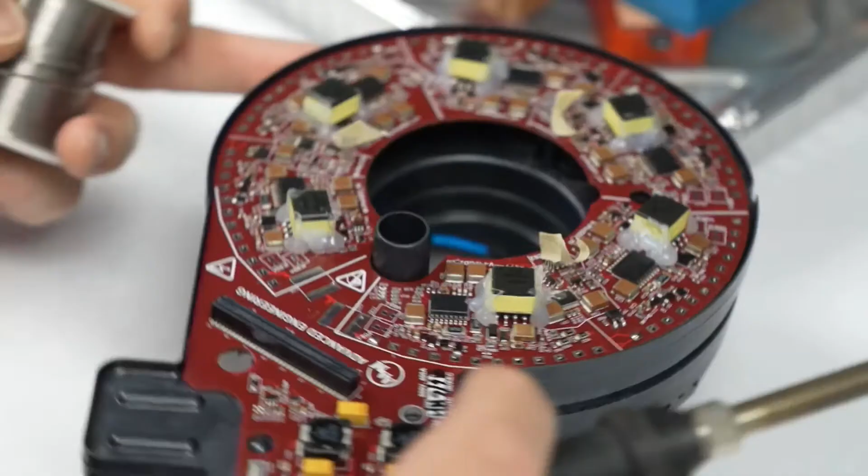Move over internal combustion. Electrification is here, and AAM is ready. We're highly prepared for multiple vehicle segments, scalable volumes, and an infinite number of challenges and goals. Breakthrough products ready now. A pipeline of innovations on the way. We're ready to go and ready to grow.

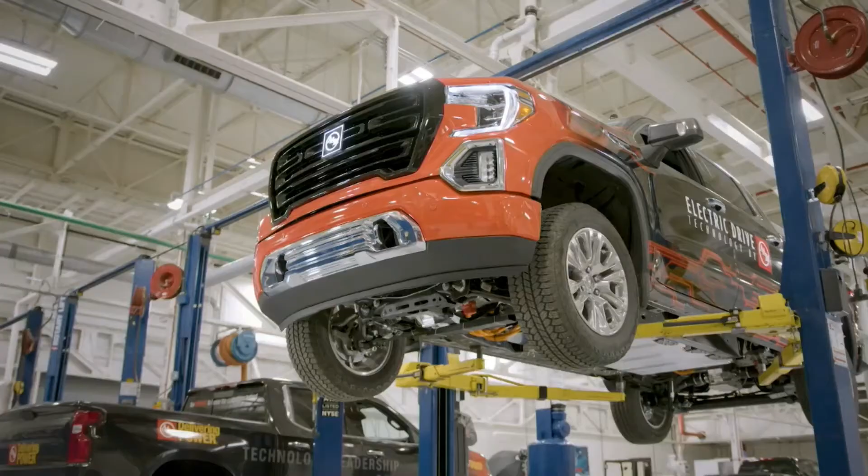What makes us unique at American Axle in terms of innovation? I really believe that our teams are limited only by Isaac Newton. Our 3 primary pillars of the company are operational excellence, quality, and technology leadership. You can't have technology leadership without innovation, so it's absolutely core to our survival.

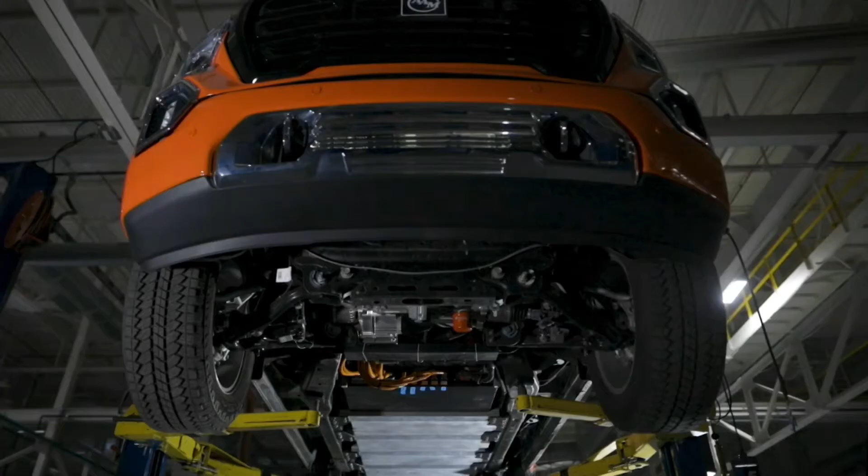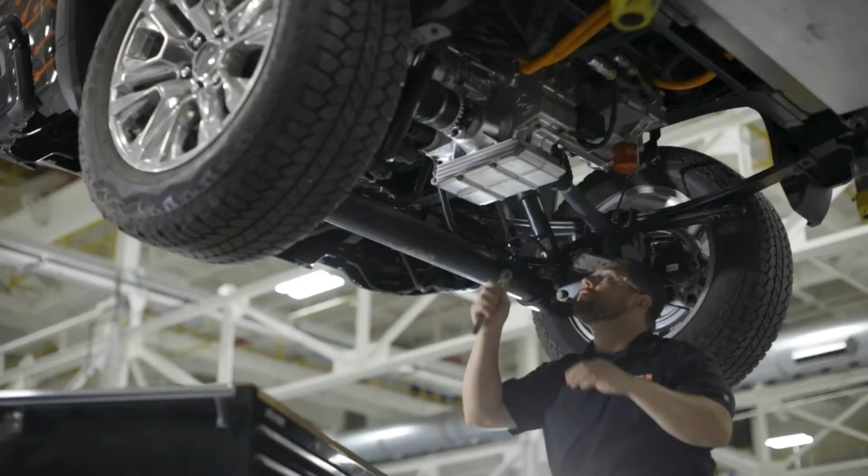We see enormous opportunity by engineering the gearbox, the motor, and the inverter all together. There's huge synergy opportunities for those all to be together. Our partnership with Inovance is very important to us, and we're very excited about it. They know all the car companies in China, they've got connections with them, so that helps us gain access to that market. They also have access to all of the raw materials and components that we're going to need to build inverters.

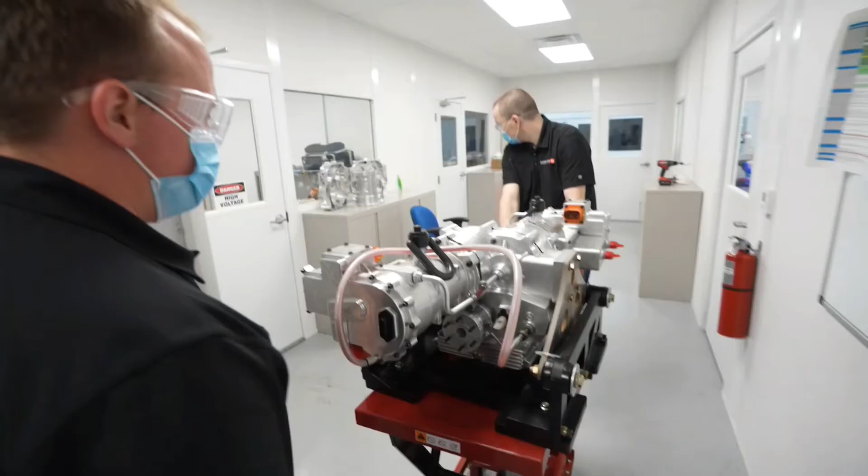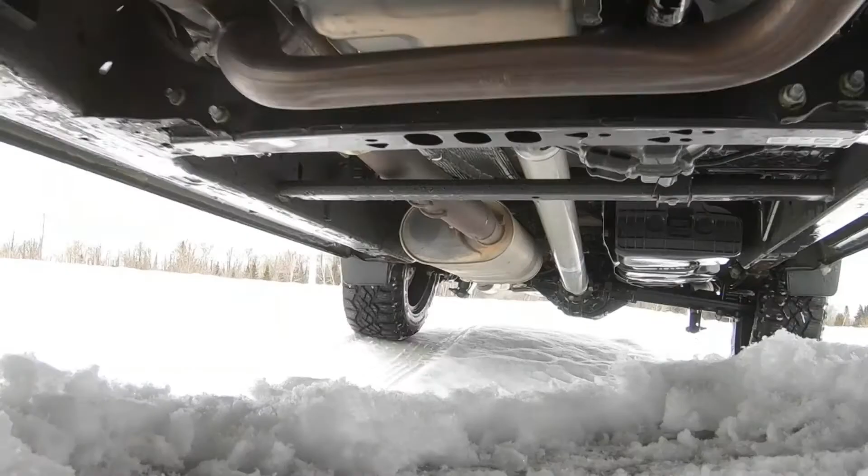What makes AAM uniquely positioned to bring the future faster is this combination of our innovative environments. We produce where our customers need us to produce. We engineer where our customers need us to engineer. Whether that's a vibration control system, a traditional axle, or an electric drive, that advantage is the same. We are where our customers need us to be.

Our vision for electrification at AAM started back in 2010. We've been involved in this space for a number of years. As many people know, we brought the Jaguar I-Pace drive unit to the market. A lot has changed in the market, but what hasn't changed is quality matters. Delivering on time, every time matters. The trust that our OEM customers have in us is very important.

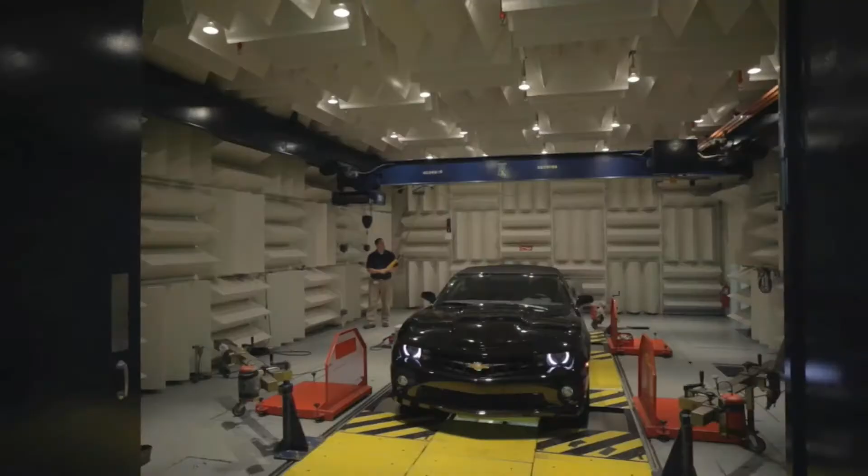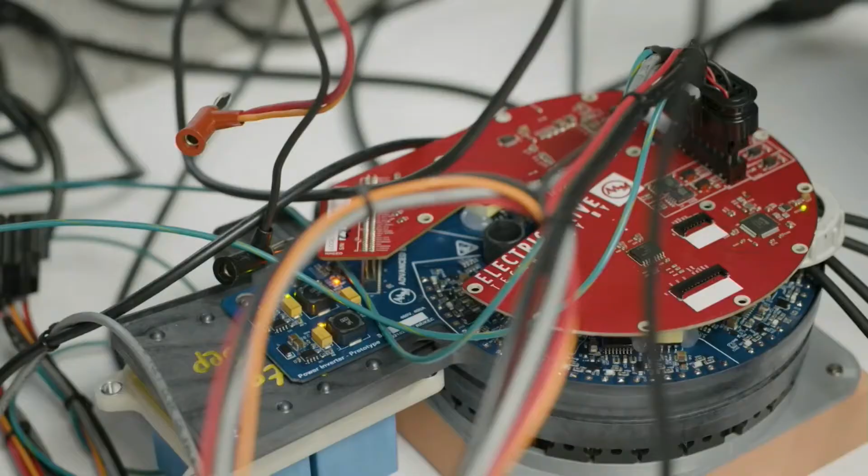It matters in the conventional space, but it matters in electrification. We take a first principles approach to how we engineer product, and we look at what is the absolute limit of what we can achieve. By pushing those RPMs higher, we're able to get the same amount of power with much less active material. By deeply integrating the inverter, we're able to find cost synergies, design synergies that overall reduce the cost of the product.

Craig and his engineering team have pushed the boundaries of what can be done in the eDrive space. They've not accepted the answers that are in the market today. Benchmarking, from our standpoint, is looking at the rearview mirror. What we're trying to do is break barriers and produce products that aren't in the market with attributes nobody's seen today.

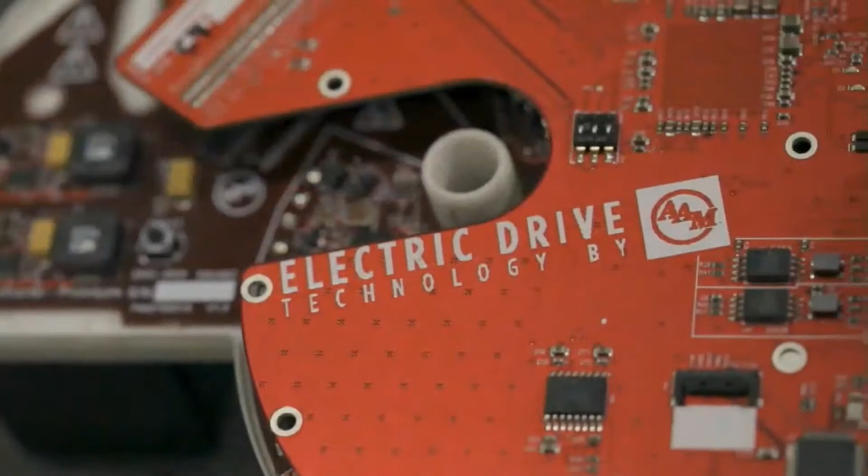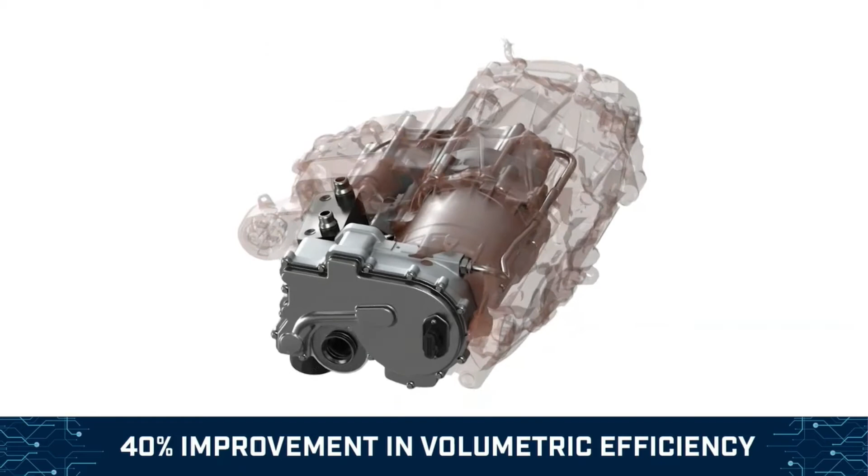At AAM, our next generation 3-in-1 electric drive systems package best-in-class power density with leading efficiency. With a 10% improvement in mass efficiency, 40% improvement in volumetric efficiency, and a 40% improvement in power density, it instantly becomes the new benchmark.

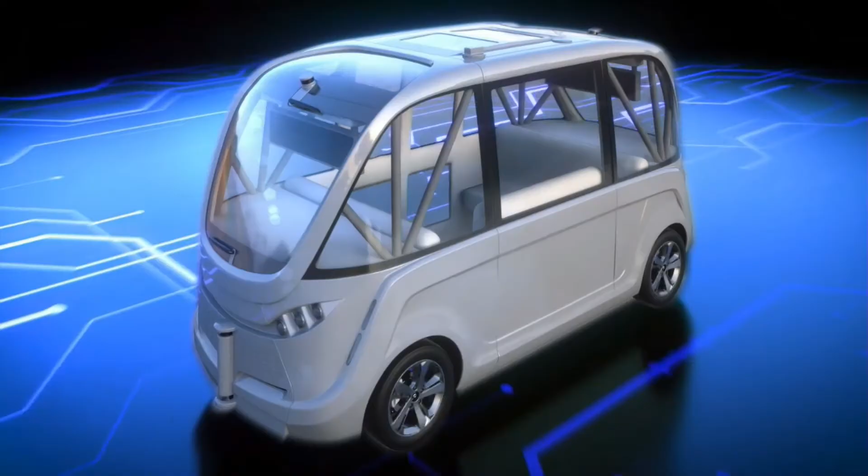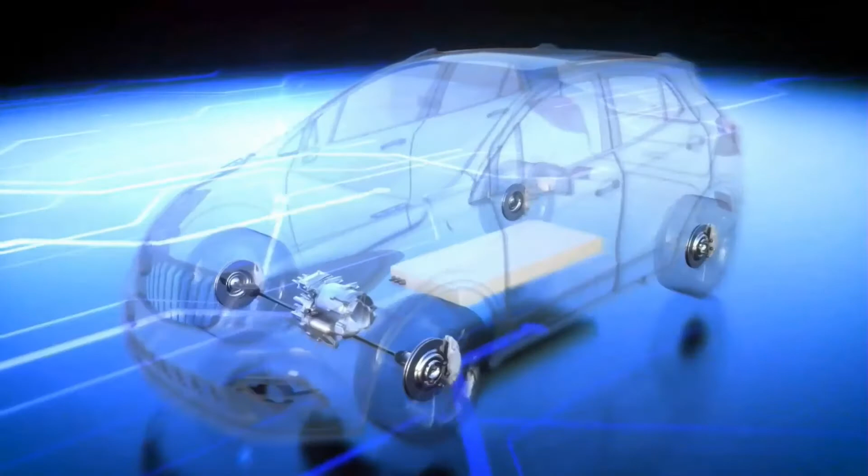Scalable and modular, AAM's 3-in-1 technology can power a wide range of P3 and P4 vehicle segments and electric propulsion architectures. The same technology used in a wheel-end motor is designed to serve in a single motor application for rear wheel, front wheel, and all-wheel drive vehicles. From there, we add power to propel even the most rugged vehicles, including heavy-duty applications.

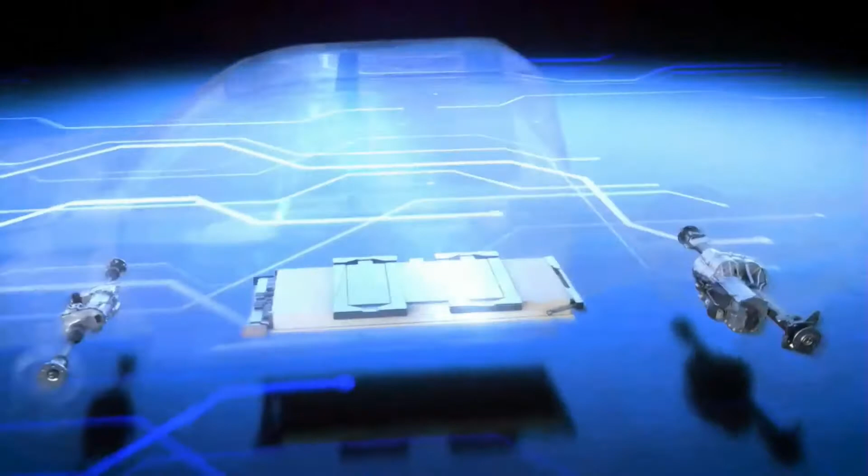From small and light to powerful and adventurous, AAM's 3-in-1 technology is always quiet, compact, and efficient. With OEMs demanding performance and investors demanding returns, it's time for gasoline to share the road and the glory. AAM, bringing the future faster.

So let me talk a little bit more in detail about what we brought to the Altair submission this year, and that's our next generation electric drive unit. As you saw, it provides some substantial benefits to our customers, and the pillars of it were we drove the motor speeds higher.

We realized the only way to make an electric motor smaller and lighter is to make it spin faster. So we're looking at a motor that will go between 24 and 30,000 RPM, which allows us to substantially reduce the package size and the weight of the active material. And the weight of the active material drives the cost of the unit.

So substantially lower cost in the motor itself. But making a motor spin faster is easy. Getting it to live inside an actual automotive application is difficult. So we've got a lot of innovation in our gearbox that enables that high speed to operate without any problems with sealing, bearings, any of that.

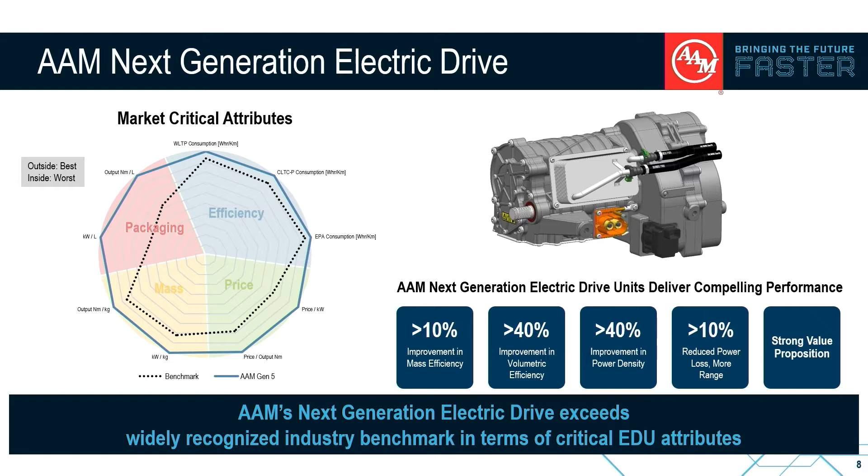The second pillar was full integration of the inverter. I mean, the first wave of electric vehicles made a lot of sense. You partner with someone to make an inverter, you partner with someone who provides a motor, you build a gearbox, you bolt them together, you find a place in the car to put that big inverter box, you run some expensive orange cables, and it works.

And it does work quite well, but it's very package inefficient. So the next wave was to take that inverter and bolt it to the motor and the gearbox. That's better, but we're going a step further to fully integrate the inverter into the drive unit. In fact, you can't even see the inverter on this because it is nestled, buried right inside at the end of the windings of the motor.

So the other innovation that makes this all happen is we're using a single fluid to cool and lubricate the whole box. So the gearbox lube cools the motor, cools the inverter, and we get some substantial efficiency improvements out of that. So the net result is we deliver 10% improvement in mass efficiency, 40% improvement in package volume.

This thing is very small, so we can deliver a lot of power in a very small space, and that improves the power density. And then the reduced parasitic losses also improve our range, because none of this reduction in size has come at any compromise for efficiency.

And so we really think it's a very exciting project to be working with. We're very honored to receive the award from Altair today because we use many of Altair's analytical products to deliver this thing quickly. We developed our software using Altair Embed. We use many of their other packages to engineer every one of those parts before we built the prototypes.

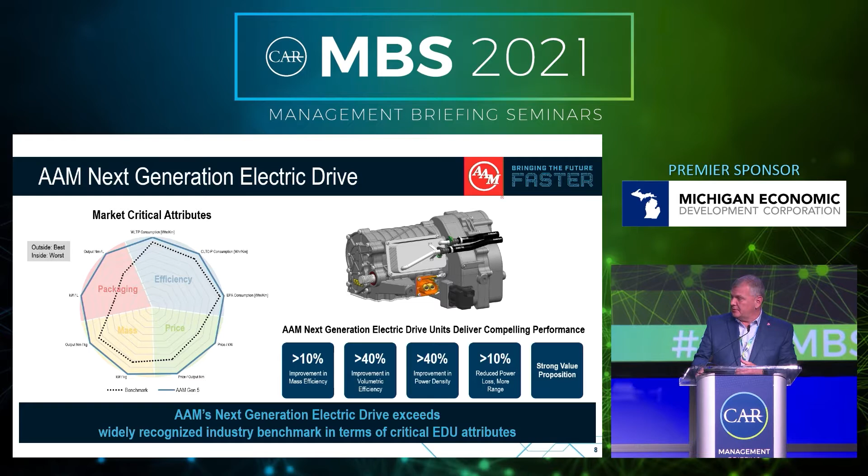So that's a quick summary of what we've been working on, and I'd like to turn over the podium. Okay.

Thank you, Craig. Love seeing the video. I've got lots of questions that I didn't even know I was going to ask till you showed that. So I'm ready to go in a little bit.

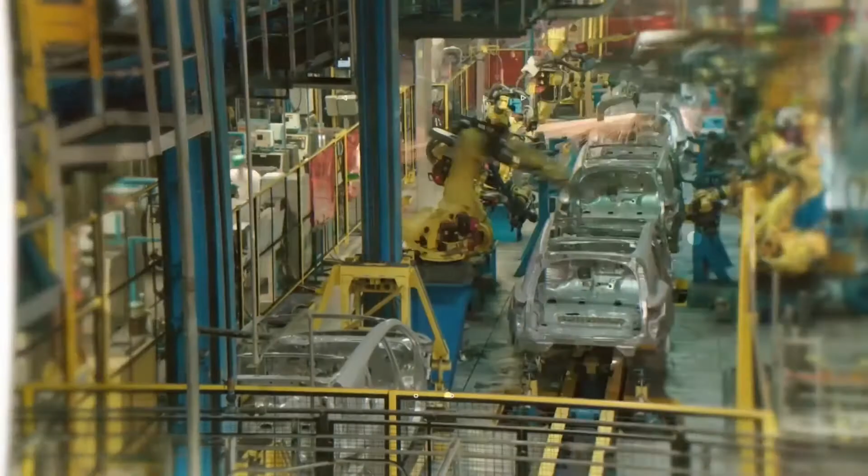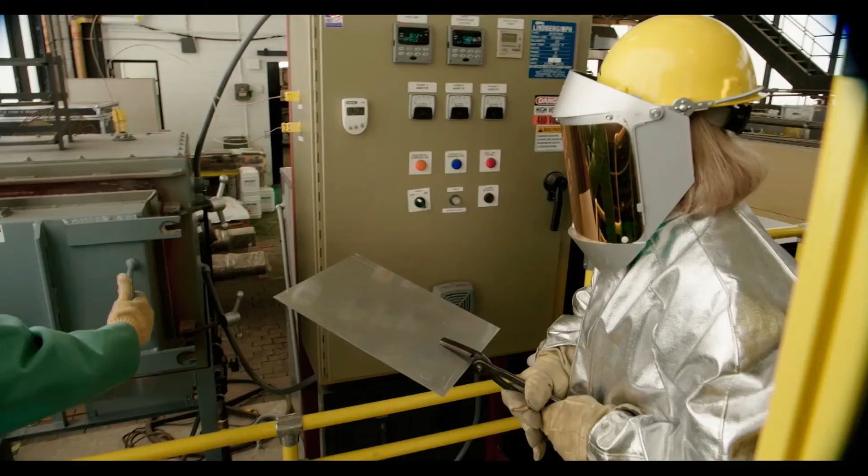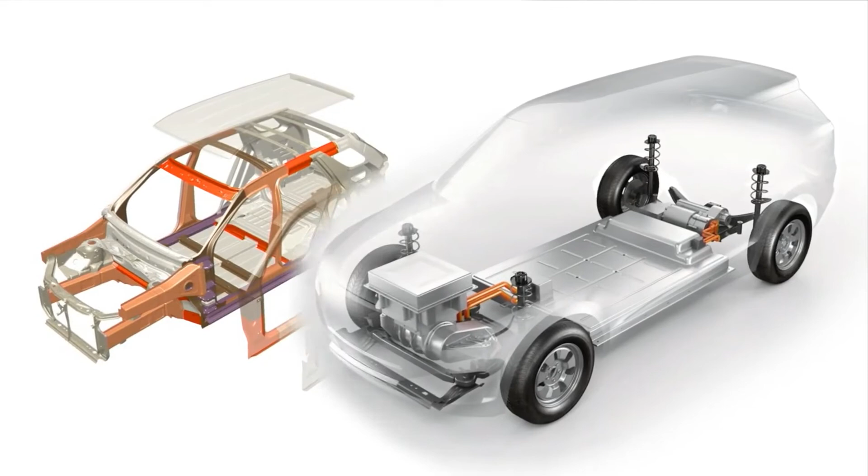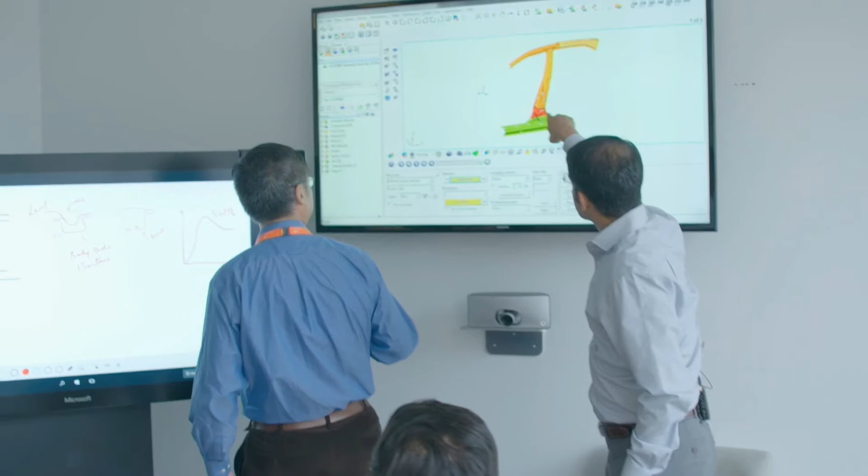Automotive manufacturing is evolving rapidly, and so is ArcelorMittal, the world's leading steel and mining company. Over two-thirds of a car is typically made of steel. With so much at stake for our environment, automakers need their vehicles to be lighter, stronger, and more sustainable, and that means steel needs to be smarter. The advanced high-strength steel we make today is six times stronger than it was 25 years ago, and our steel is evolving to meet the needs of the automotive industry as it transitions to carbon-neutral mobility. Our smarter S-in motion steel solutions are lightweighting automobiles, protecting batteries, and providing a safe structure for electric vehicles. ArcelorMittal invests heavily in R&D to create steels, steel solutions, and steel-making processes for the future. To ensure our innovations match their changing needs, we embed resident engineers at our customers' design and engineering facilities so we can be proactive in translating their needs to affordable steels.

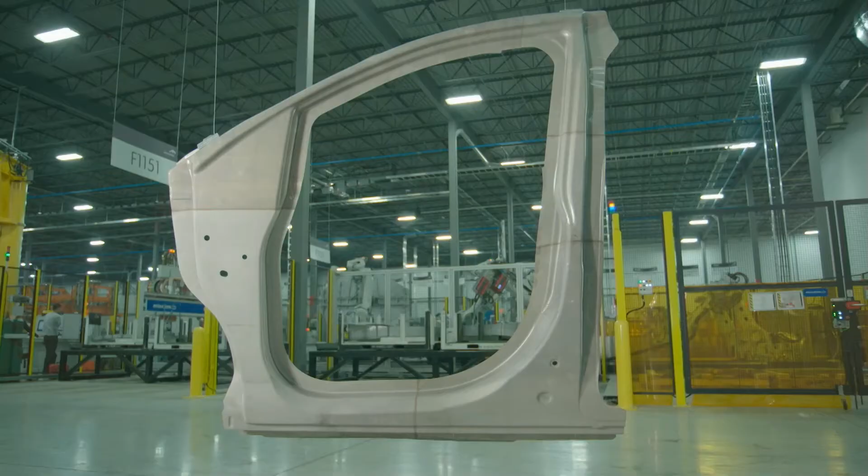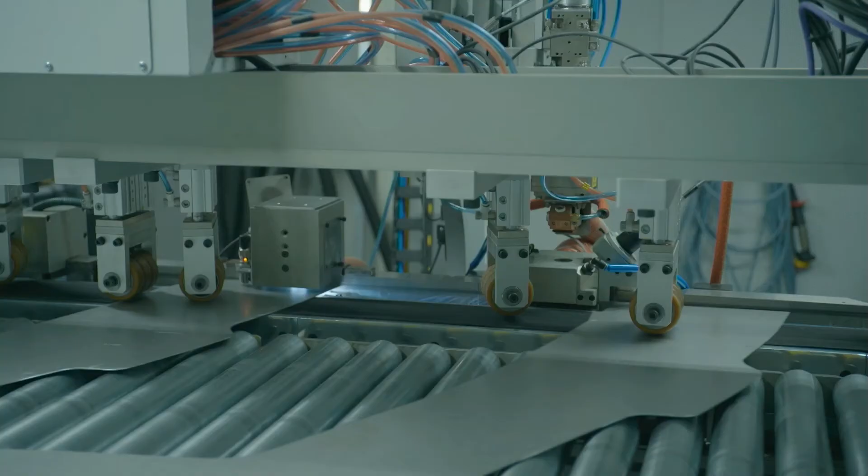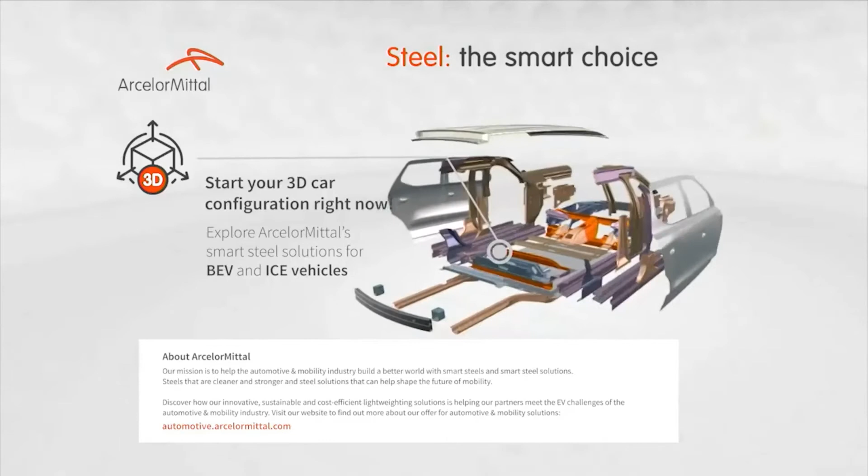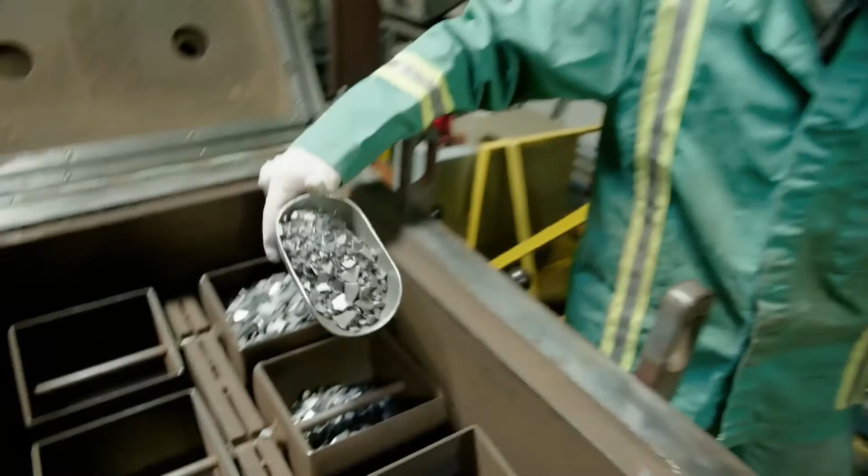What we do is find ways to use some of the newest steel products we develop and incorporate them into various part designs that automotive engineers can work on. Working closely with OEMs is critical because they start looking at the steels they'll need four to five years ahead of the model launch. We also help make sure that every part we help design, or any new idea we come up with, can actually be manufactured, using a lot of computer-based simulations to ensure the parts can be stamped well. We are driven by expertise. Our research is global, enabling us to provide the best solutions to our customers. To visualize our new smart BEV steel solutions, an online car configurator shows how our range of advanced high-strength steels and smart solutions can meet the lightweighting, safety, cost, and sustainability performance targets of BEV producers. As we seek a carbon-neutral future, ArcelorMittal steel is the material that drives change.

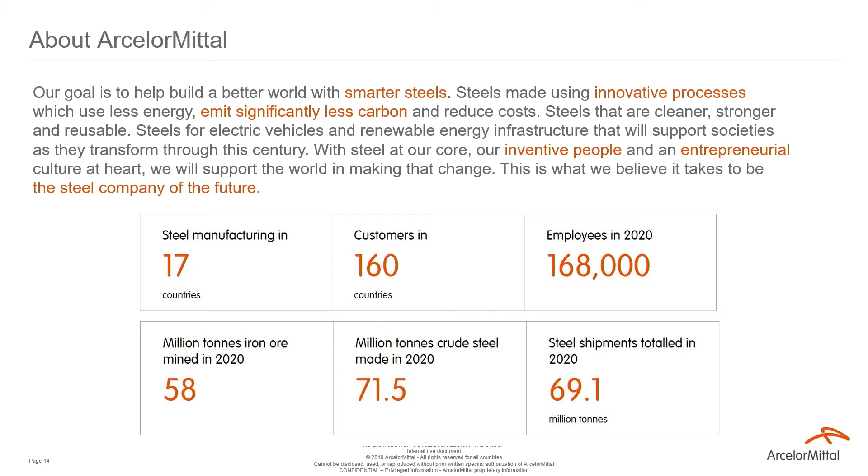Building on a few quick highlights about the company, we are the world's largest steel and mining company, serving customers in 160 countries and manufacturing steel in 17 countries. With more than 168,000 employees, we are not just a company, we are a community. Our scale and scope means we are the only steel company that can truly leverage global best practices across different regions of the world. For us, an invention or an improvement in efficiency can quickly transform into reality in our day-to-day operations. Our commitment is to be at the forefront of the next phase of transformation by inventing smarter steels for a better world, by being a technology leader focused on sustainable product and process innovation.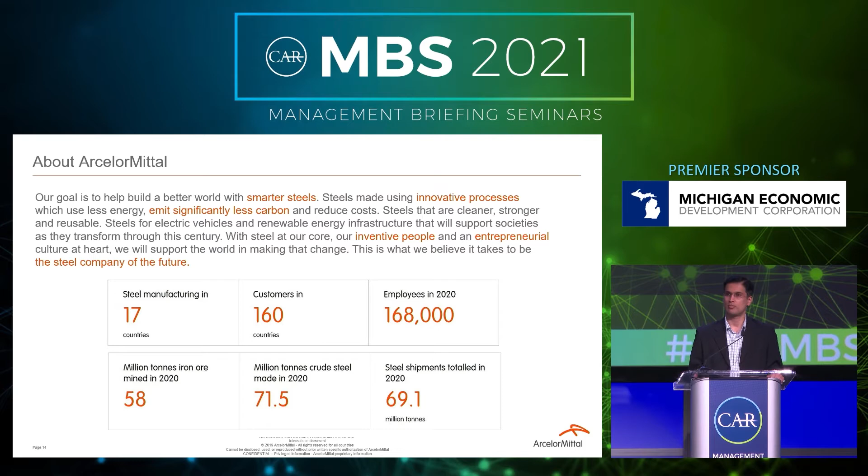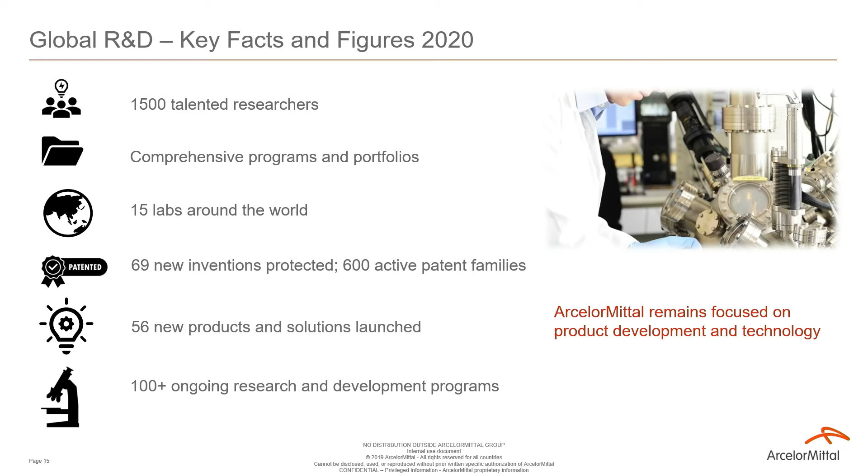A few key quick facts about our global research and development: today there are thousands of grades of steel, hundreds of which did not exist 10 years ago. Just in the last 10 years, we have doubled the strength of steel, and in some cases doubled the formability at the same strength levels. Just think about that relative to the changes in the industry. These new steels, many developed by our scientists and engineers, push the boundaries of what's possible. We have some of the best and brightest people in the business, engineers who want to work for us because they get to tackle some of the most complex problems. Of the 1,500 researchers at ArcelorMittal, at any given point in time, somewhere in the world, about 600 of them are actually working on auto-related activities.

So, what are we doing to prepare for the future? Constantly innovating. And how do we do that?

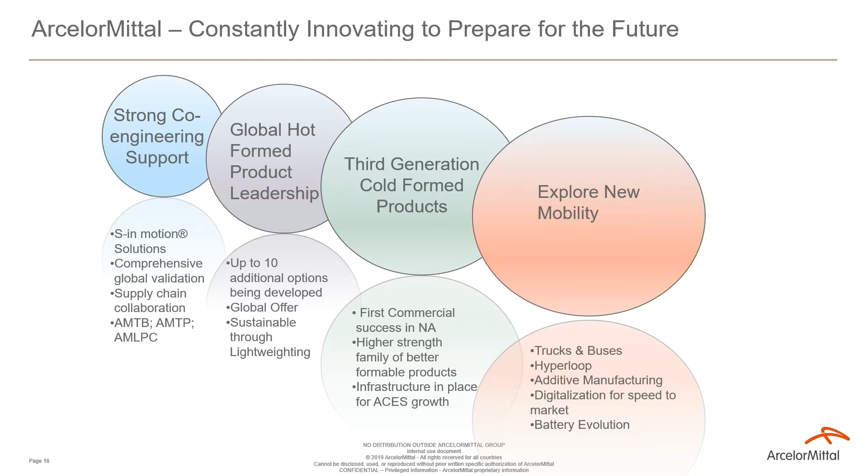It all starts through our strong co-engineering efforts and the resident engineers that we have. Here's a fun fact: in 1990, ArcelorMittal was the first steel company to actually have a resident engineer within an automotive customer. And here we are, more than 20 years later, we have resident engineers either within or near design centers of almost every major automaker.

The next one, the global hot form product leadership is based on a strong portfolio of patented products and solutions, with up to 10 additional options being developed right now. The third generation cold form products, we are leading the way in North America. Fortiform 980, the award-winning product, is only one of them. These grades provide the best formability at high strengths, thereby enabling it to be designed by automakers in their vehicles.

A mobility future that features electrically powered and autonomously driven vehicles will bring major change in the way OEMs are designing, engineering, and the materials which they use to make the car of tomorrow. As the definition of personal mobility changes, steel's value proposition and continual gains in performance will ensure it has a central role for decades to come.

Innovations in battery technology make it possible for OEMs to continue achieving the lightweighting and driving range goals more cost effectively with steel versus other alternate materials.

So this is one of our product development axes of PHS, or what we also call hot stamping steels, which are specifically developed for press hardening and offer strengths of up to 2,000 megapascal.

The Ductibor product family listed on the top left has already shown 15 to 20% lightweighting versus the first generation. And the next generation, we're already targeting another 10% weight saving.

The Usibor family of products, which is further to the bottom right, has led to 10% weight savings versus the previous generation, which is over and above the benefits of conventional AHSS. Interestingly, the first use of Usibor 1500 was actually back in 2001.

The Usibor and Ductibor grades, our patented products, can also be combined thanks to laser welded blanks. What this enables is significant lightweighting with optimal crash protection and higher corrosion protection, thereby giving primary applications in safety and structural components such as front rails, rear rails, B-pillars, and most importantly, the innovative door ring solutions, which were also shown in the video, and flooring solutions.

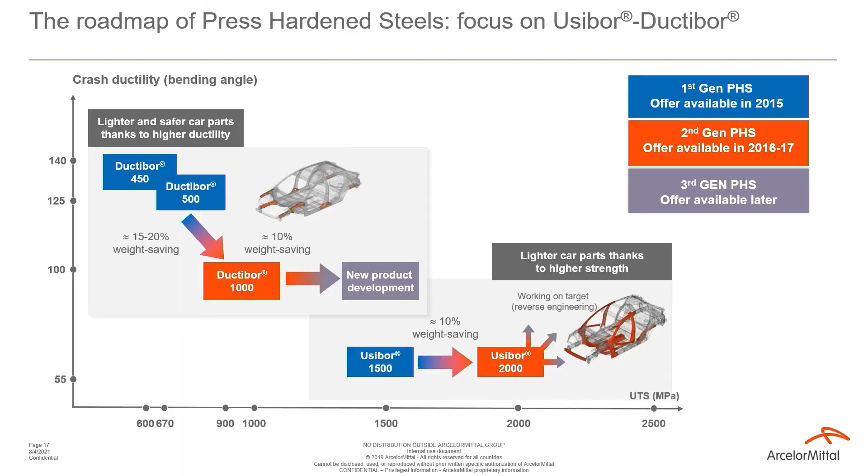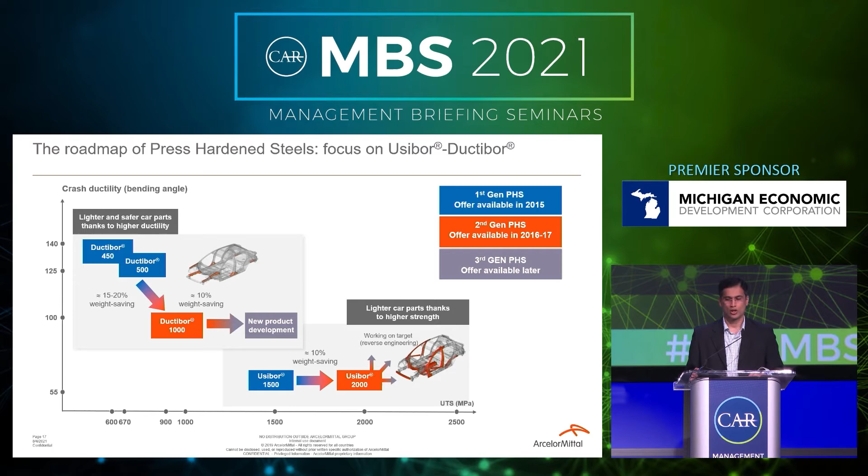And to mention, all of these grades and products are available in every major auto producing region around the globe today. For the next generation PHS products, we are focusing on breakthrough ductility, enhanced corrosion resistance, and optimizing hot stamping costs to ensure that they further support the lightweighting of vehicles.

Another product family, which is the third generation, or Gen 3, for AHSS, or Fortiform as we call it, allows OEMs to lightweight structural elements using cold stamping. Fortiform products are produced using a quenching and partitioning process that creates a unique microstructure, translating into a combination of high strength and exceptional formability. We've already achieved 10% lightweighting versus the standard DP grades.

The next generation Fortiform S products would further enable lightweighting at these higher strength levels with formability, with weight savings of up to 20% versus the conventional HSS grades.

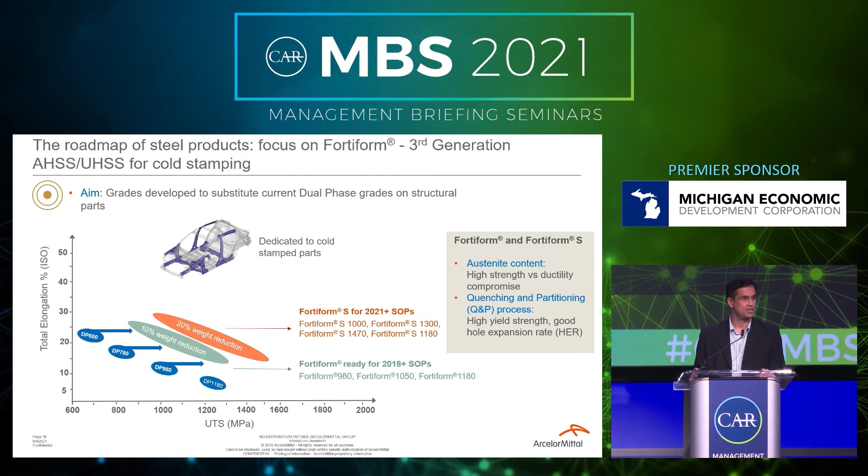Getting into the Fortiform 980, the award-winning product in the lightweighting enabling technology category, it's actually now been adopted in vehicles recently launched, and they're already on road.

From a mass perspective, it offers the ductility of dual-phase 600 at these high strength levels, allowing complex shapes to be formed. It has demonstrated reduction of thickness by 10% or 20% while achieving the same energy absorption levels for these parts. And the 20% weight savings, that's already been validated by our OEM customers.

From an applicability standpoint, how did we get this product selected by customers? It all started with our co-engineering efforts and customer engagement going back to 2016.

That's 5 years ago. And this led to innovation after thousands of hours of simulation, lab tests, trials, stamping trials, customer qualifications and trials, which finally led to the adoption of these products.

Our product was found to demonstrate superior liquid metal embrittlement, or LME resistance, in an auto steel partnership activity, thereby establishing a benchmark in the industry. Through our early vendor involvement, we ensure smooth launch for any product, just as we did in this case.

So, where are we heading in the future for breakthrough products? It all starts with the weight of the car, which is key to its fuel efficiency, but the challenge is to improve it while also ensuring safety, cost efficiency, and recyclability.

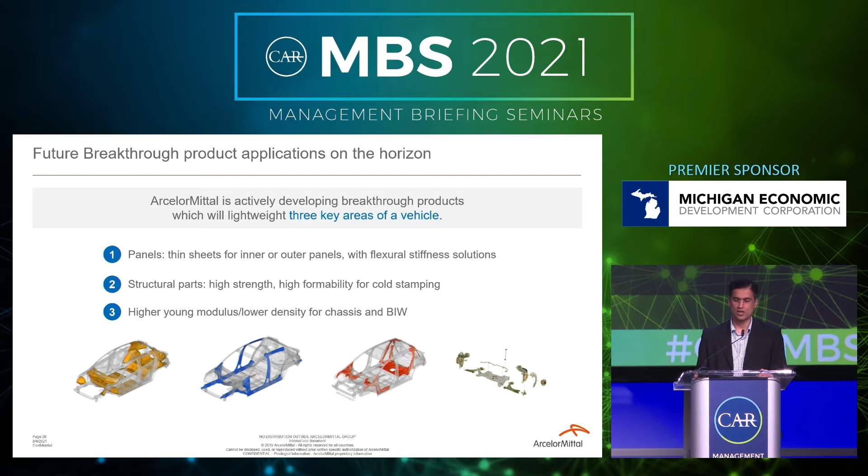Hence, we are focusing further on 3 key areas of the vehicle, starting with panels, thin sheets for inner and outer panels with flexural stiffness solutions, the structural parts with high strength, high formability with cold stamping, and high Young's modulus or lower density for the chassis and body-in-white applications.

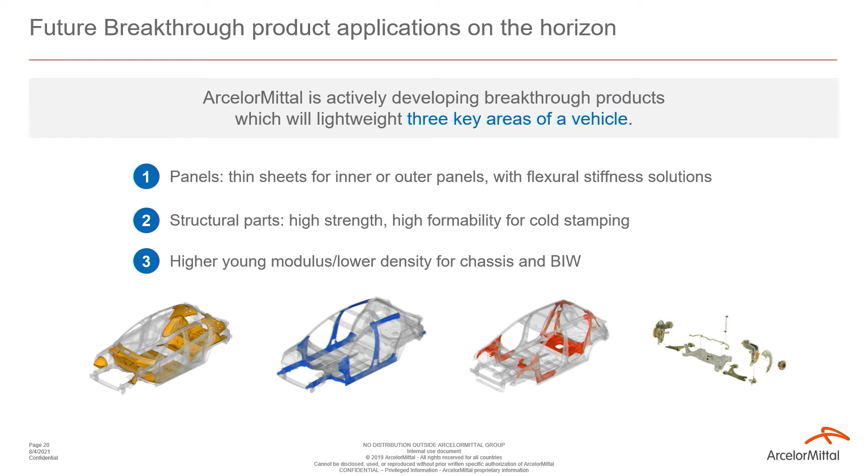As highlighted earlier, we are also developing smarter steel solutions for battery protection, chassis and body-in-white applications of BEVs, as the latest extension of our S-in-motion range of steel solutions. In a nutshell, we are actually a technology and solutions provider that just happens to produce steel. With that, thank you so much.

Thank you very much, Shalaj. I also have many questions now for you too.

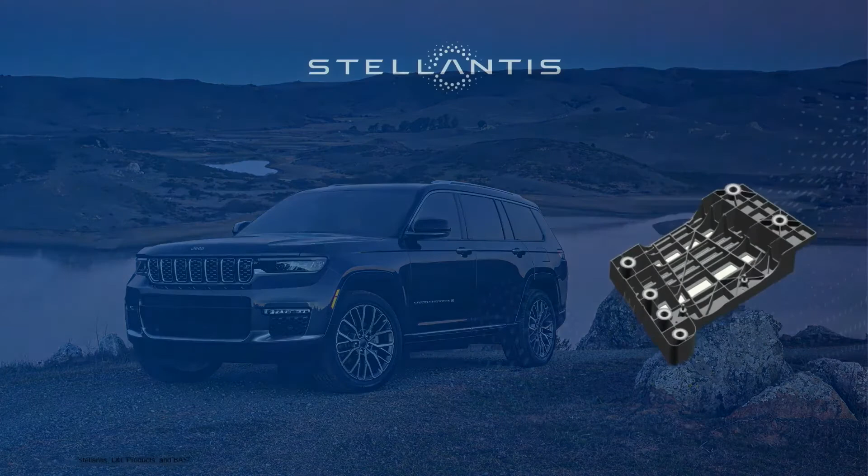So we started working on the project for the Grand Cherokee. It's a composite tunnel reinforcement. You might ask, what is a composite tunnel reinforcement? Hopefully we can describe this in the video that's coming up here.

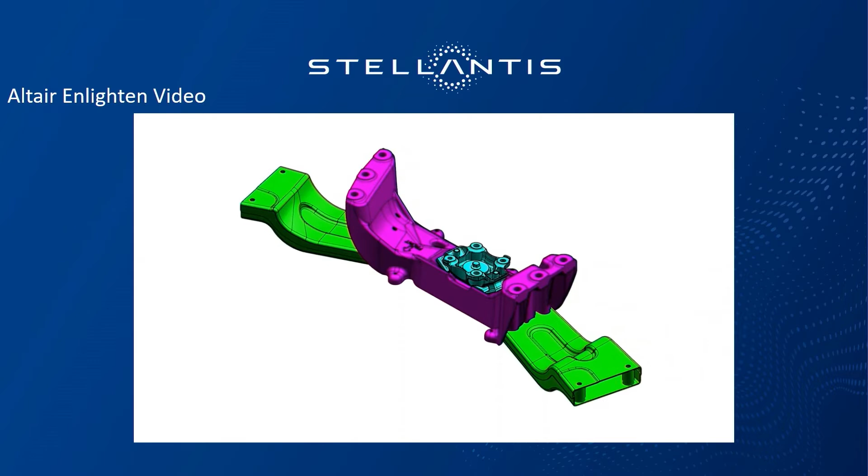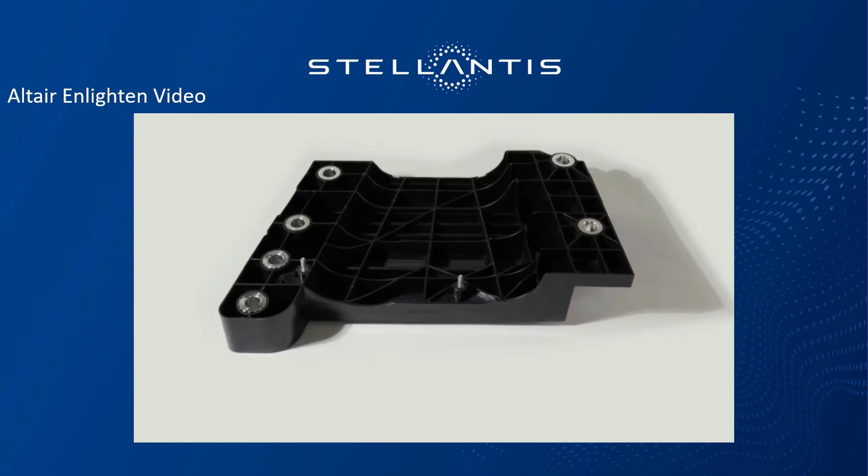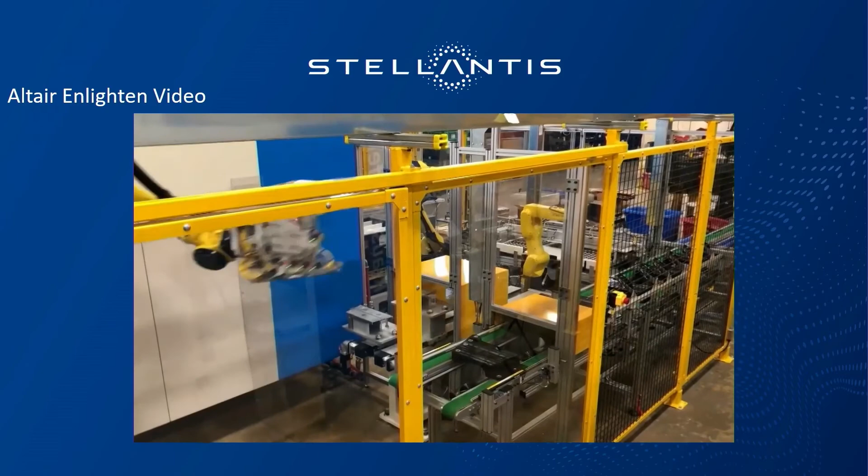The traditional solution that Stellantis had was steel, which is heavy, and they were looking for a weight reduction in their vehicle. Having a pultruded insert that's overmolded with a thermoplastic with inserts allowed us to develop something that hasn't been used before. We had begun discussions with L&L on this, and it moved into a co-development.

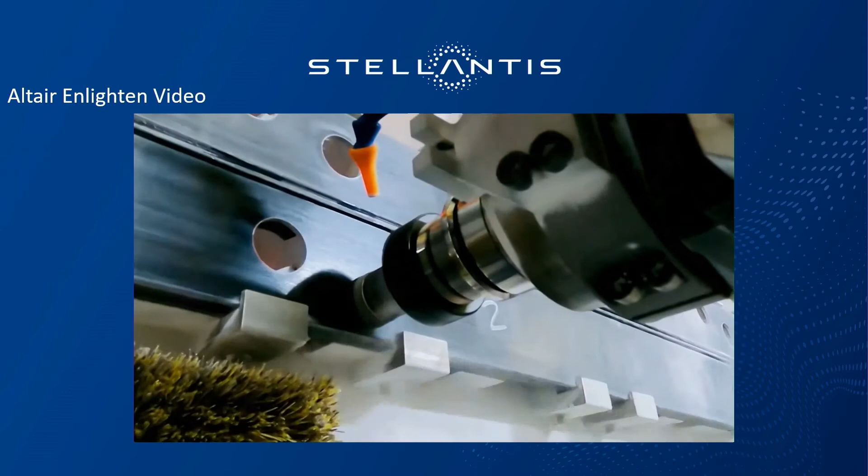It took 4 years where we were actually trialing our initial localized formulations at L&L Products. With that came all the know-how, which we shared moving forward, not only finalizing the formulation, but then with processing, and most importantly, the CAE analysis, where we actually came up with a methodology to accurately predict it in a physical model.

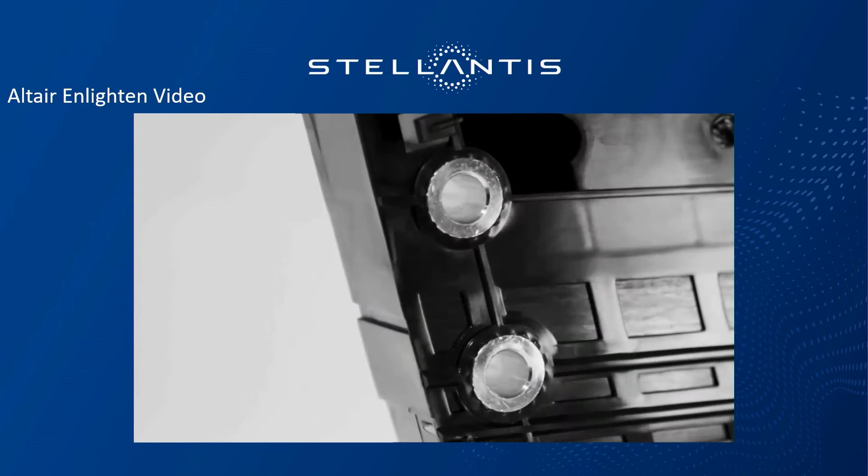This is replacing the original concept of a high-strength steel clamshell with steel inserts. This is required to pass some of the safety requirements of the vehicle.

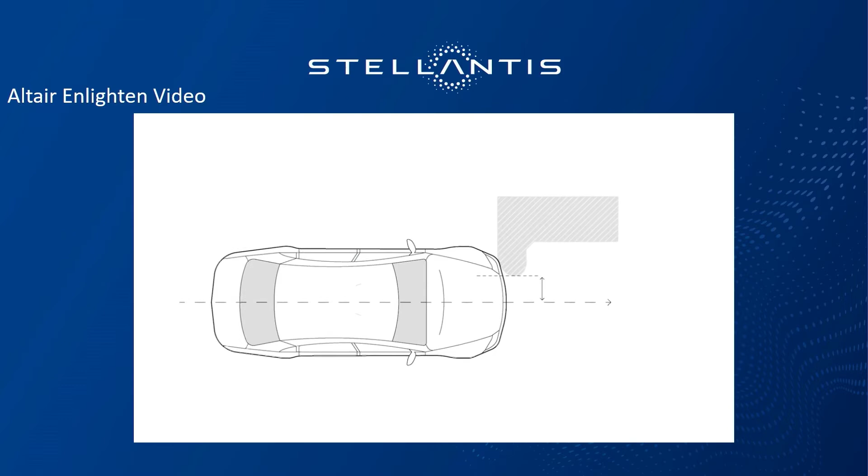This is during the small offset barrier test, where the car runs into a barrier and the load is transferred from the rocker panel to this component, transferring the full force of the vehicle impact over to the other side of the vehicle. We validated this design in their full vehicle model to meet the performance requirements that they had.

We created sub-models that we could then test in the laboratory. Regarding magnesium, aluminum, or steel, even ultra-high strength steel, our strength-to-weight ratio is 3 times greater than any of the metal solutions out there today.

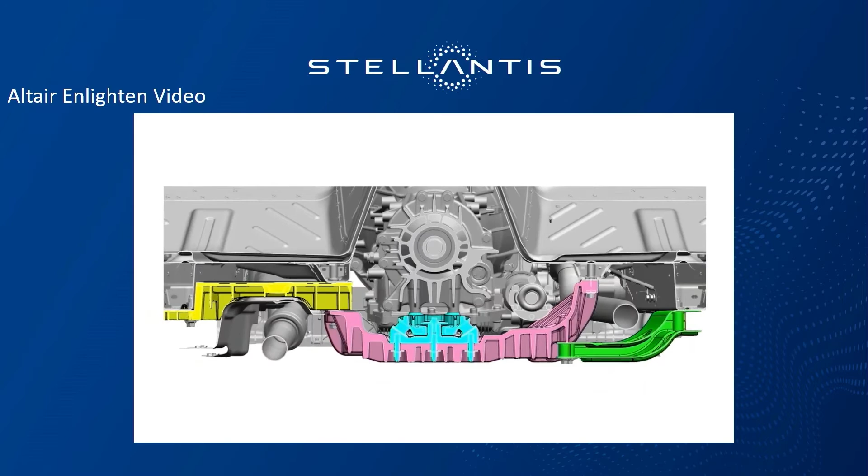We were able to package our part in a slightly smaller configuration than the steel did, and the way we designed it into the system, we were able to take mass out of other associated parts in the system. After this first application, I think we really opened up into understanding where else we could go with it.

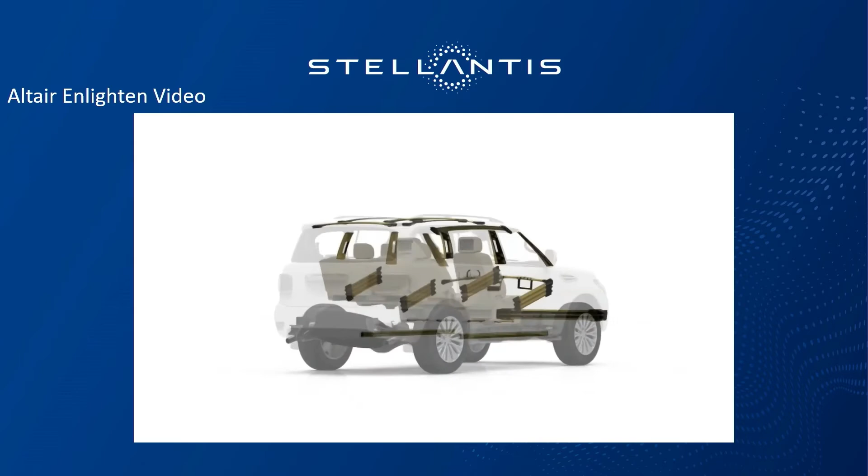It is anywhere in the chassis where it's dominated with metal today - rocker panels, cross-car beams, door intrusion beams, crush cans, bumpers, especially for the new drive with e-mobility.

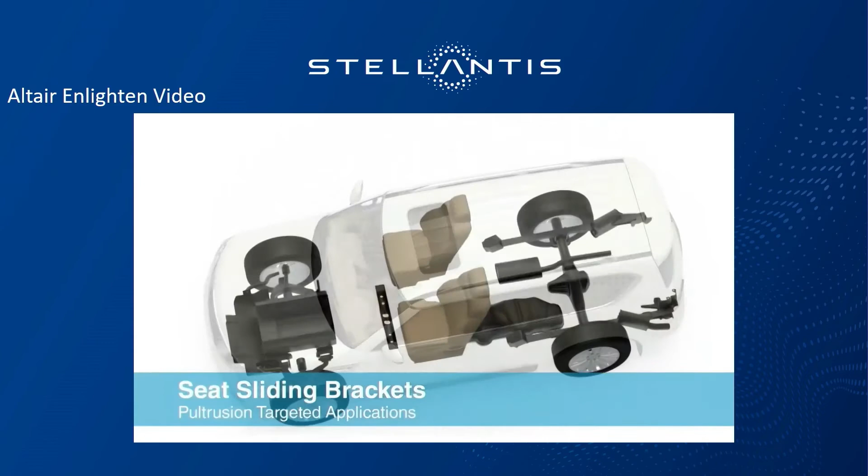We were looking at battery protection, all kinds of different structures required for enhanced occupant protection, especially working with L&L Products, who understands the process of developing methods to create different shapes and different ways to sweep the profile. The opportunities are almost limitless.

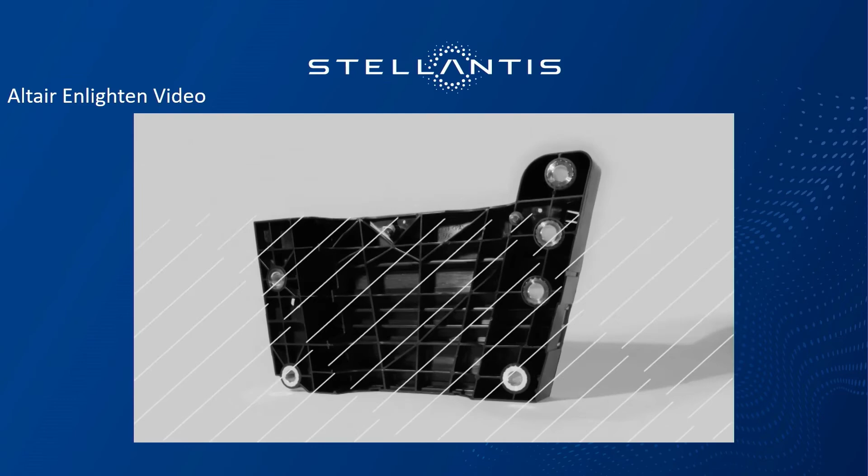The neat thing about this launch is we did so much work up front in the prototyping and validation that this part's actually launching like any other part would launch. Very little fanfare at the OEM. That's a good thing. The lower weight contributes to better CO2 emissions and better gas mileage, and the overall cost of the system in raw materials is less than steel, which could really make this a game changer.

So you could see it truly was a partnership and innovation. As we went through this, this part at its heart has a pultrusion insert inside of it, and then it's overmolded with a thermoplastic. In doing all of this to create this part, we believe there was a series of firsts in the industry. For Stellantis, this is the first composite of its type on a very high volume production car.

Second first was the resin system is new. This resin system comes from BASF, and then we were using it at L&L in our CCS systems, and it's the first time that this polyurethane system has been launched on a part like this.

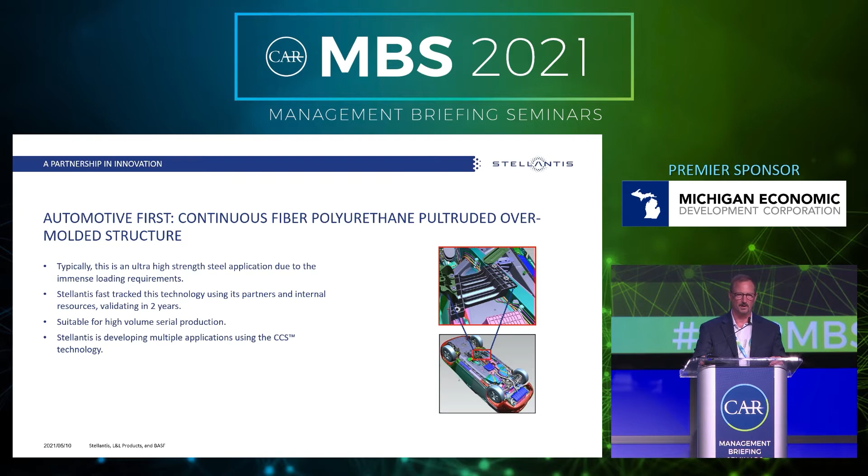So for Stellantis, the first to be able to launch it on a high volume car, they really had to fast track us through. So we did a lot of development, both internally at Stellantis and at BASF. We did a ton of development, but it helped us. And like I said in the video, it was very little fanfare. It meets what it needed to, and it exceeds its functional requirements.

As far as the new resin system that BASF had brought to L&L, we helped co-develop it on our lines. It works fabulously for us to get the rates that we need. Good wet outs, excellent mechanical properties. It's a very high volume fraction of glass, so we get incredibly good strength out of this.

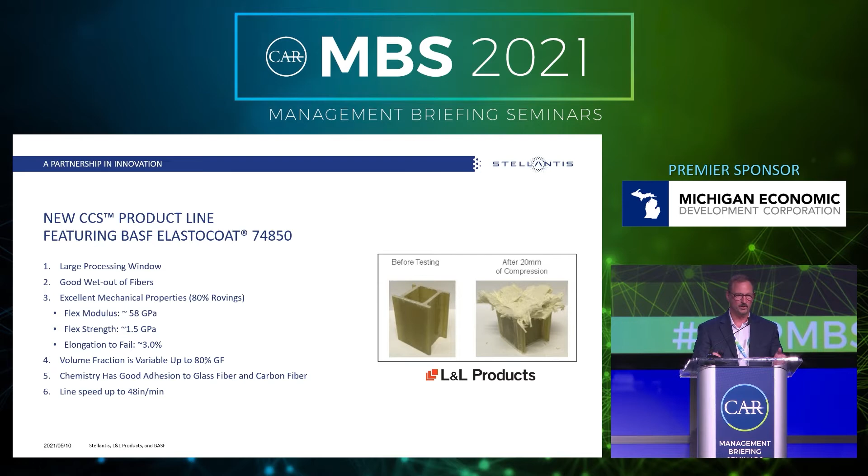When we look at the design, we mentioned in the video that we replaced a clamshell high-strength steel component. We did that by developing this part and taking what we heard from some of Stellantis's assembly guys, who said you really need to be able to do this and do that. And so it really helped us package this further into the vehicle.

We added things to this that make it so easy for the guys in assembly. They snap it in, and then they can come back and put the bolts in with both hands.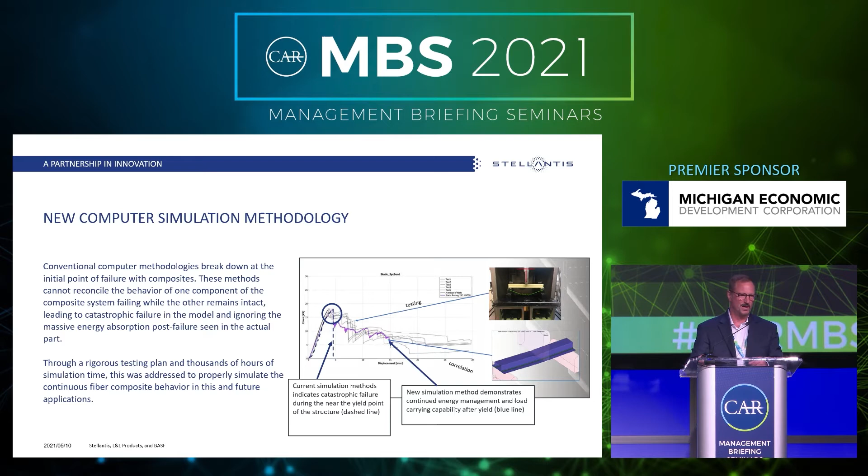Working with BASF, and even some of the experts at Altair, helped us with some ideas on how to create this. This has been a real game changer for energy management with composites.

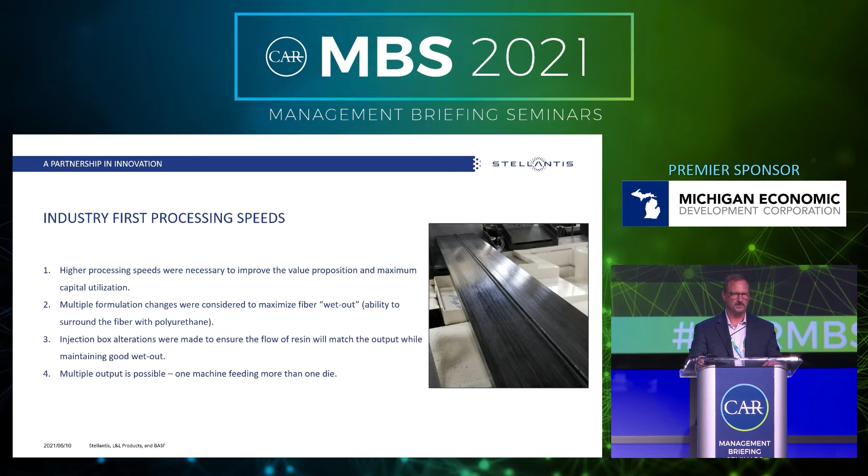I mentioned the line speeds before, trying to make this economical. We are pultruding at rates that far outrun any of the industry standards.

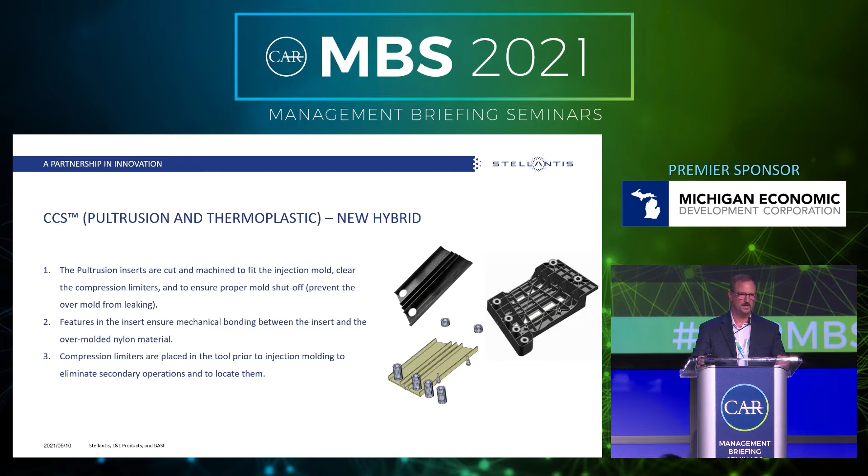But this hybrid solution at the end, where we bring together all these, L&L is open for visits, and to see this injection molding machine is quite a marvel. We have 3 different robots on it. We're picking up all those 9 different components, placing them, we're scanning them, we know what they are. These parts go into a rotary injection molding machine that puts everything together. Everything is scanned as it comes out. We even put a born-on date with a laser at the end, and then it's put onto a conveyor. So this hybrid system is a very unique and great thing for this part.

So in summary, the composite tunnel reinforcement, first in the industry like this. It had a 40% weight savings for the component level. It had 20% savings for the overall system that it was working in. It also brought a cost savings. So one of the big things that we were worried about is, are you doing something that's lightweighting but is cost neutral? In this case it was. It's not only cost neutral in piece price, but it was a savings in tooling compared to the other one.

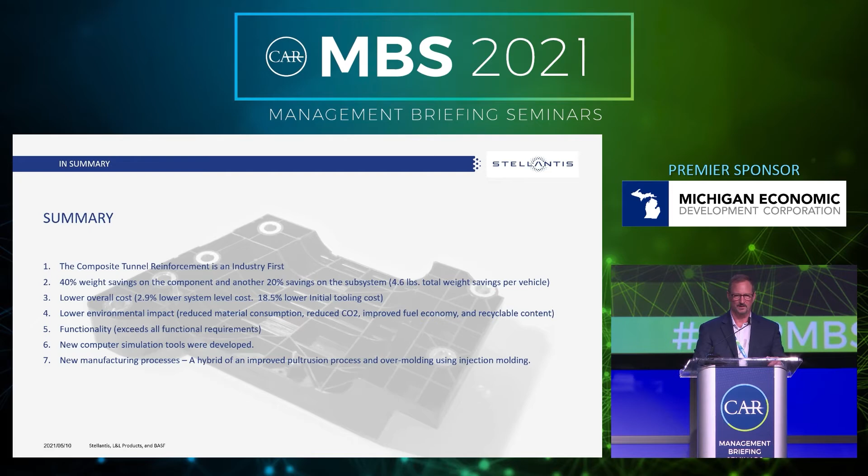So our lower environmental impact, we're using less materials. The vehicle is less weight, so we can get better fuel economy. The functionality exceeded everything that we needed to do with this part. The new computer tools that we developed to be able to simulate this is excellent. And then this new manufacturing process.

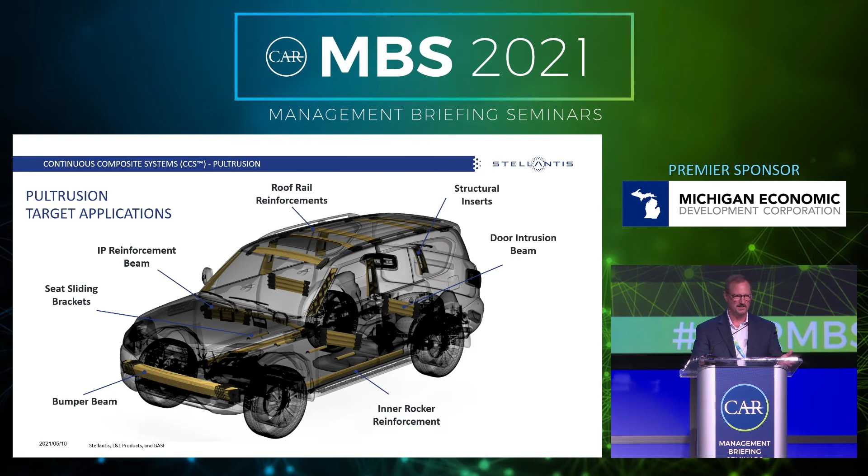Thank you, Hank. Before I forget, you mentioned, you invite people to come and see this great piece of equipment. At CAR, we have a coalition for lightweighting automotive materials, and we often take field trips, so I'll get back with you on that. Yeah, we'd love to have you. Yeah, that would be great.

I do have some questions submitted. I'm going to start, though, with all 3 of you, very kind of different areas, propulsion, metals, composites, but all of you talked about increased speed and increased, earlier development and co-working with your client. Tell me a little bit more about that, and maybe some of the tools that have been developed to enable this earlier work and faster work. And you especially mentioned about quality and speed together. So maybe we could start here, and Brian, you can explain to me what you meant by that, and then maybe I can hear from the others how they're working differently or what tools you're using to enable that rapidity.

Okay, we use a variety of analytical tools for every aspect of the design. The one I mentioned, I'll expand on a little bit because I think it was a really great example of how to move quickly. We developed our own inverter from scratch, and I'm proud to say that was done. We're a global organization, but all that work was done right here in Michigan at our tech center in Detroit. And developing the software from scratch to drive an electric vehicle is a pretty daunting task. But we were able to use Altair embed software, which made it very fast, very easy to iterate, and it had a lot of existing tools within it to provide the ability to do motor commutation and all the things we needed to do. We were able to get this vehicle running in just a matter of months with 2 software engineers. And we have companies out there looking for, we need to add 1,000 software engineers. So the idea that we can get a fully viable prototype electric motor running with 2 software engineers is testimony to the tool. And then we've applied other Altair tools in many other places to help us get from the concept to hardware substantially faster than we normally would.